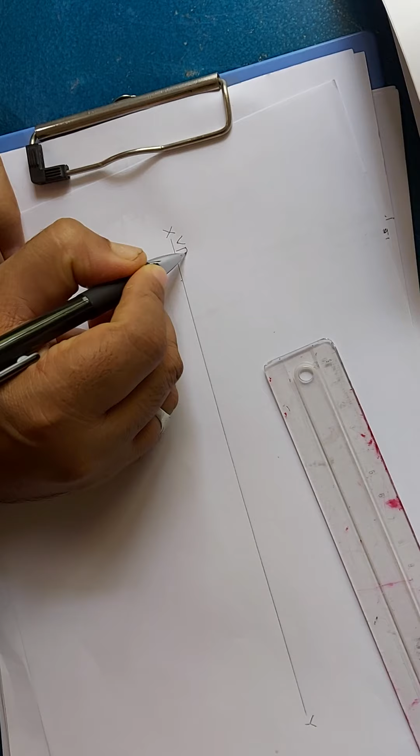Now we have to do the drawing. First we will draw the XY line. Mark VP and HP. Since one of its corners is on HP, whether the corner rests on HP or a side rests on HP, you will always have a side perpendicular to VP.

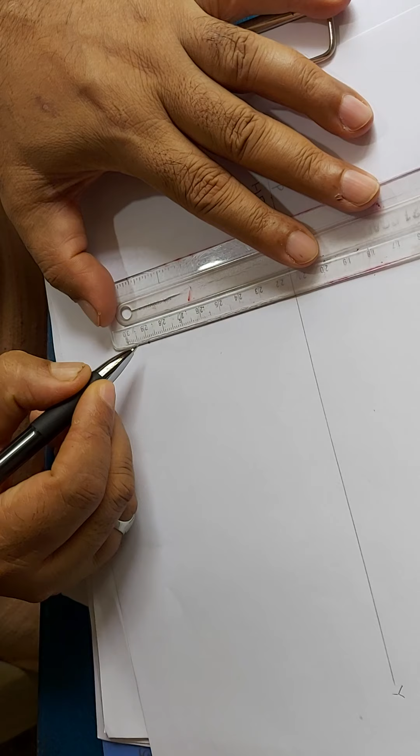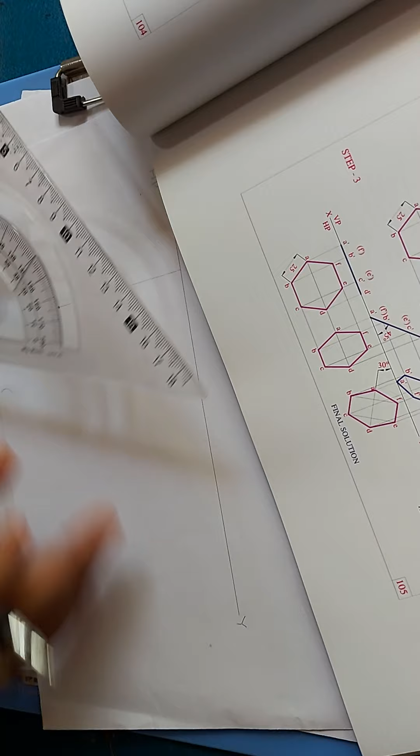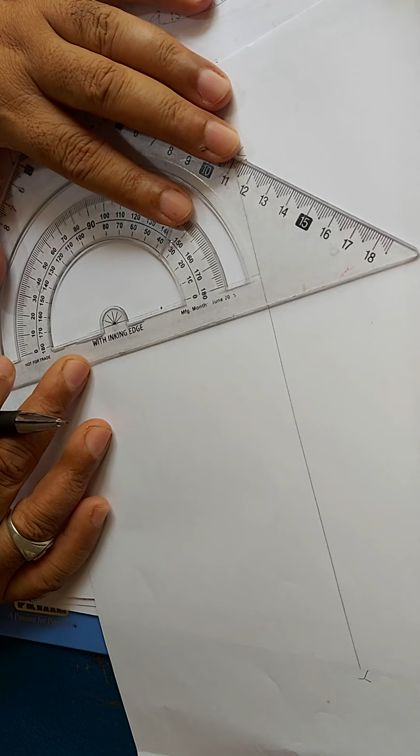From here you measure 25 mm. So you take 25 mm and mark this point. From this point you mark 72 degrees, the exterior angle, and similarly from here you mark 72 degrees from the external side. Mark this point and then draw an inclined line, and similarly from this,

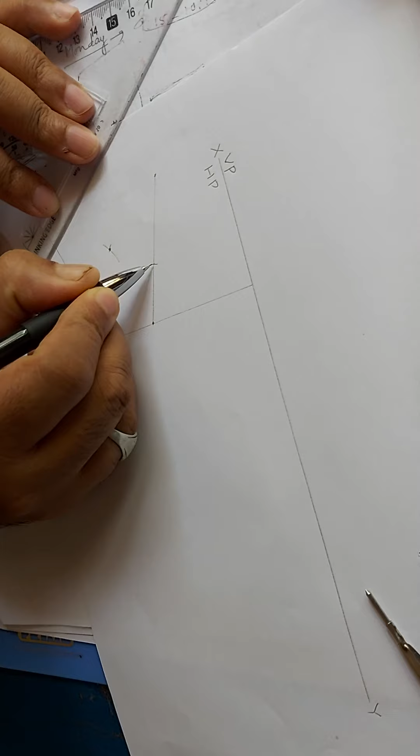then using compass measure 25 mm and from here you cut an arc. Similarly on this side also. Then from this point you draw an arc, and similarly from here you cut the previously drawn arc. So now we have the points. This is A, B, C, D, E. Then dot these sides.

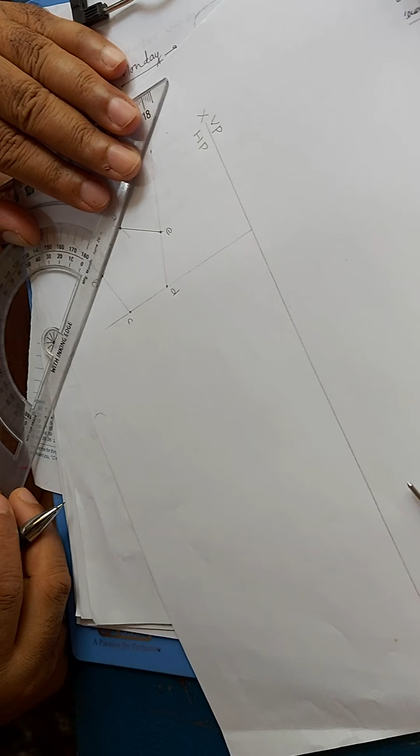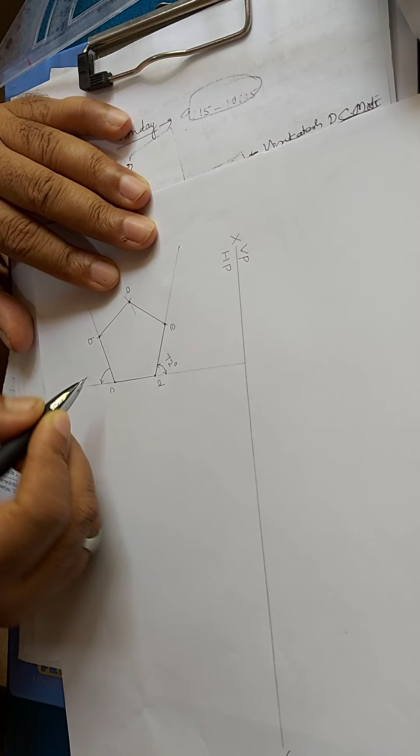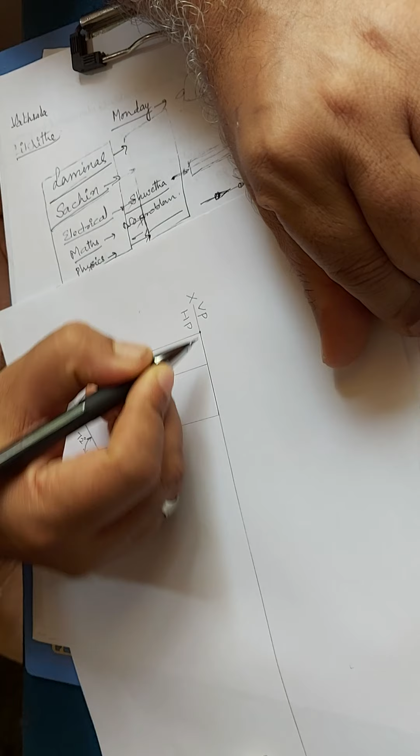So this is the exterior angle, which is 72 degrees from here to here. Similarly from this side also it is 72 degrees. And now from here you project to the front view. This surface is parallel to HP and perpendicular to VP, so you are getting a line in the front view. This point will become A dash, this point B dash and E dash in bracket. Similarly this point will be C dash and D dash.

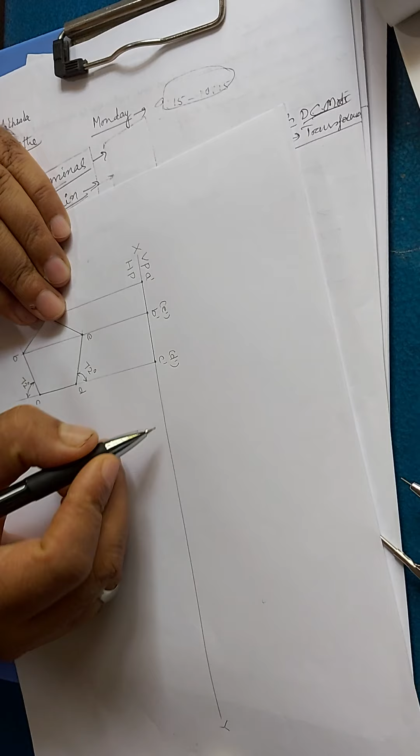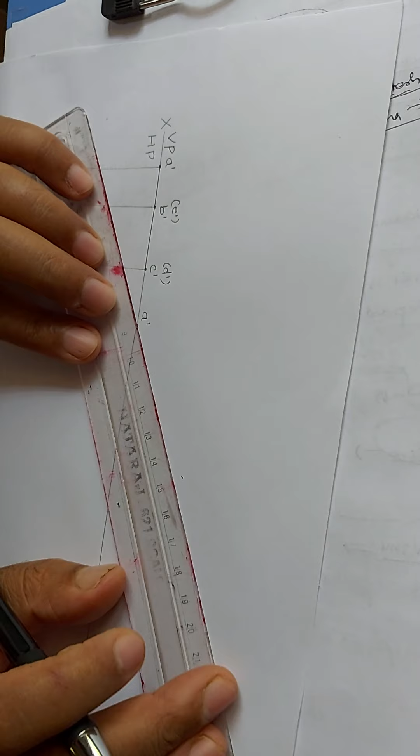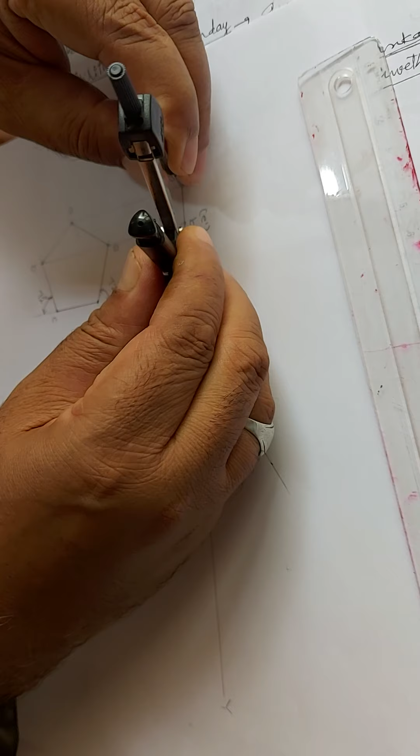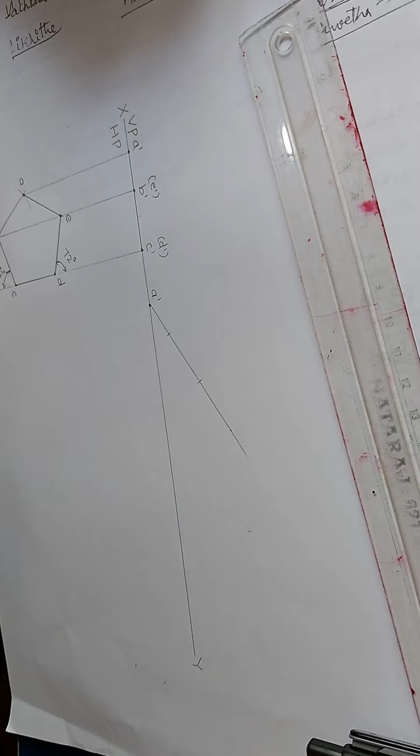Since it is placed on one of its corners, A dash will be on the XY line. From A dash measure an angle of 30 degrees with HP and draw an inclined line. Measure the length from A dash to C dash D dash using compass and cut an arc on this. Similarly measure the length from A dash to B dash and cut an arc. So this point will be C dash D dash, and this point will be B dash E dash.

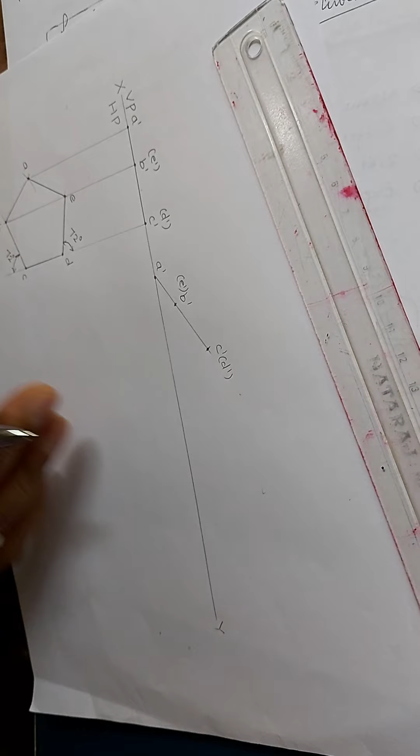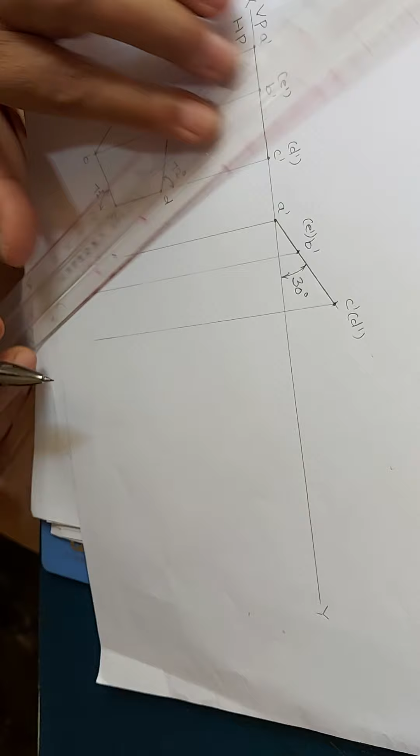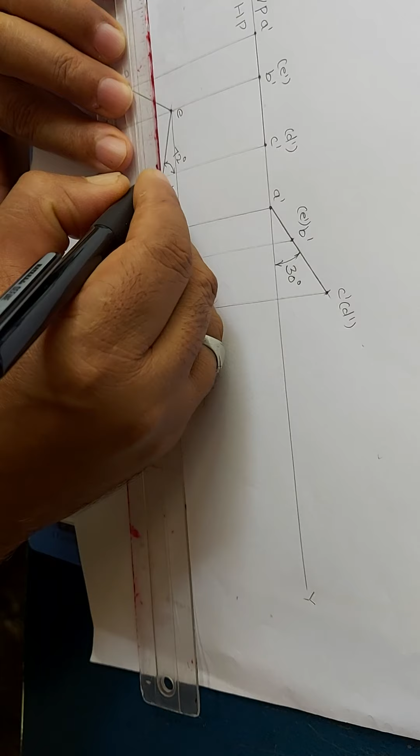Then draw a dark line. Measure the angle as 30 degrees to HP, so the surface is inclined at 30 degrees to HP. Then draw vertical projectors down from each point, and then from here draw horizontal projectors. This is A, this is E, this is B, this is C, and that is D.

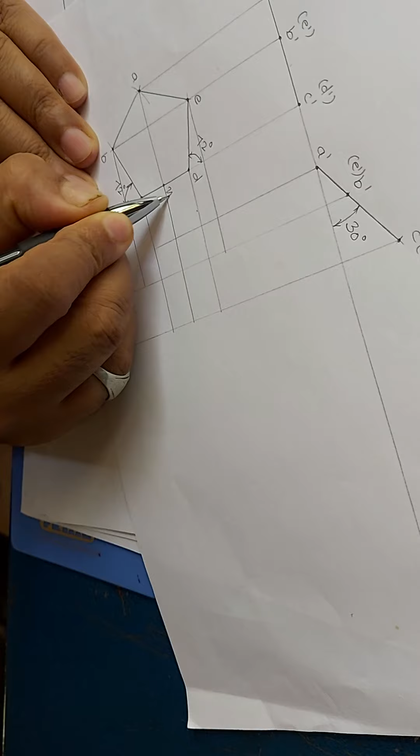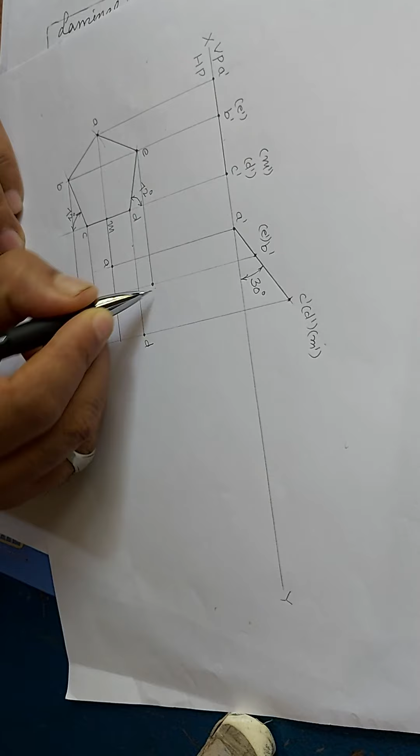Now the perpendicular bisector is the line joining the corner to the midpoint of the opposite edge. So this point will be M. This will be M dash, and this will also be M dash. So the points here are A, B, C, D, E, and M. Since the perpendicular bisector is inclined to HP, we are getting the apparent length. And now darken ABCDE.

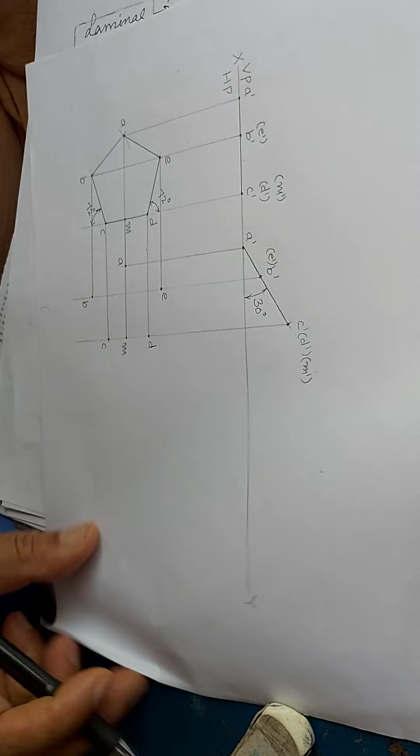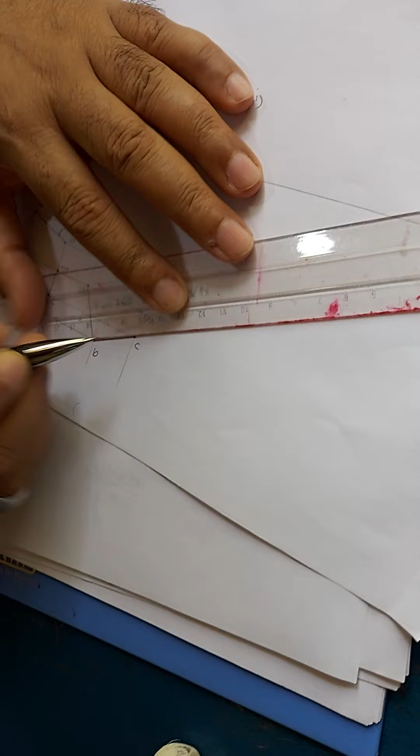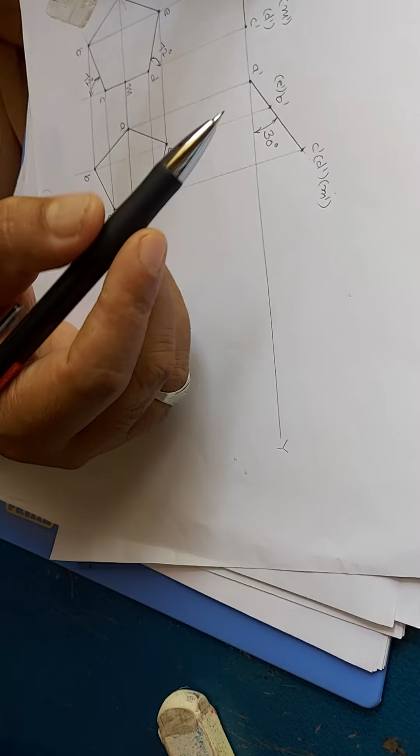C, D, E. The perpendicular bisector passing through the corner on which the lamina rests. So which is the perpendicular bisector passing through the corner on which the lamina rests? A dash M dash is the perpendicular bisector passing through the corner. Corner is A dash, so that is this point.

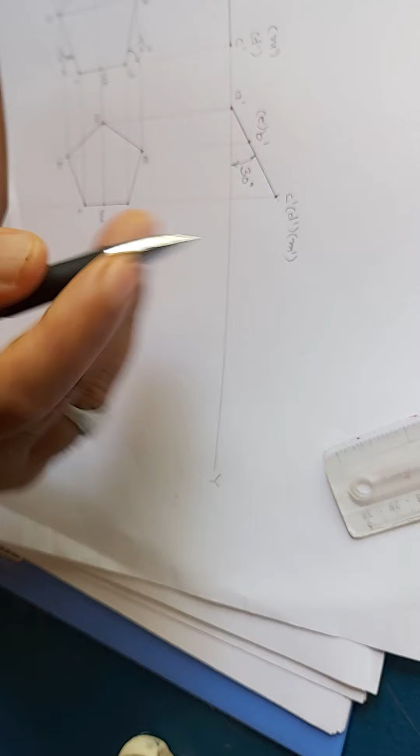Since the perpendicular bisector is inclined to HP, you are getting the apparent length. Since he says it appears to be inclined, the inclination given is also apparent inclination. So the length is also apparent. So we are going to transfer the point directly, or the length directly. So consider any point on the XY line and draw a line inclined at 30 degrees to VP. So I consider somewhere here.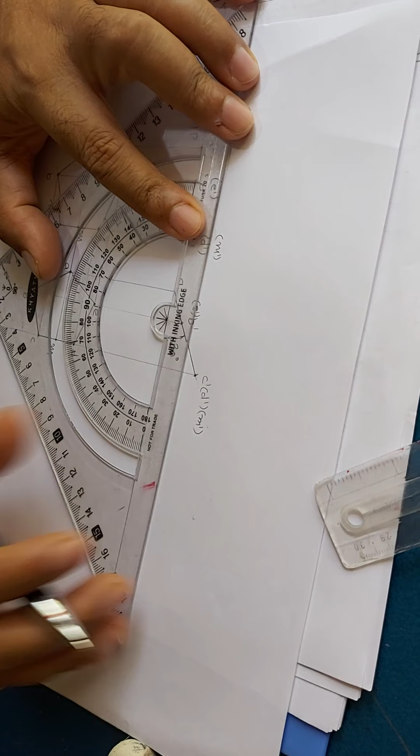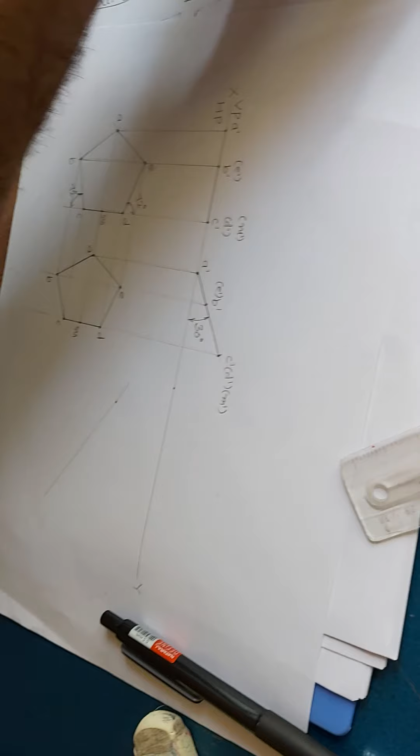From this point I will draw, to utilize the best utility of the sheet. So I will draw from here, measure the length, and only draw this 30 degree somewhere here. Then you measure the length from A to M. So I have to reproduce this sketch. You measure this from A to M, consider any point, and from here you join this. So this point will be A, and this point will be M.

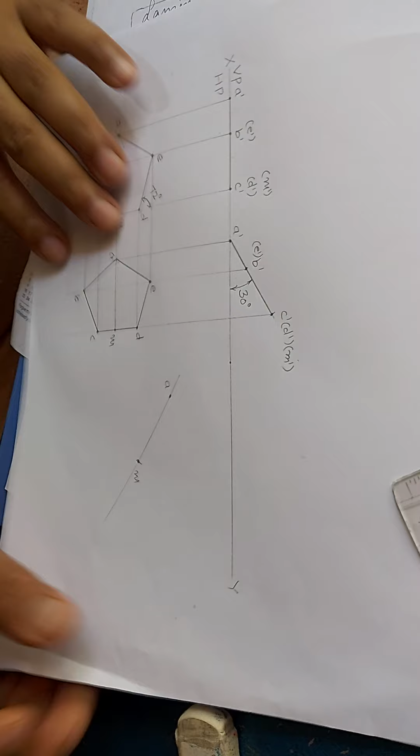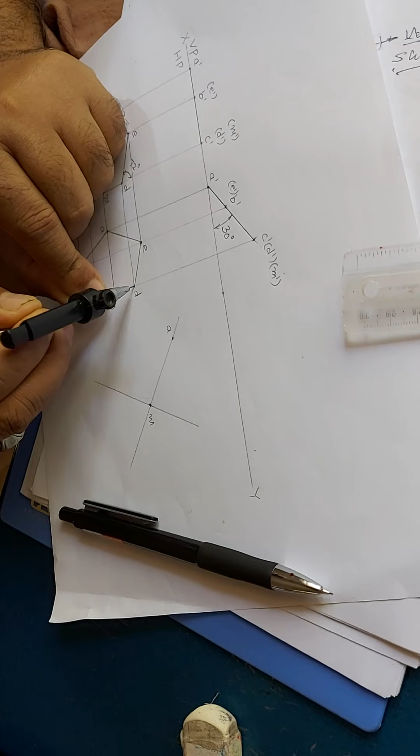Then through M you have a line which is perpendicular to this. So I will mark through that a perpendicular line. By using the protractor, you mark that perpendicular to the inclined line, and then transfer this distance from here to here. So from here you mark this point on this side, and similarly on this side. So this point will become C, and this point will become D.

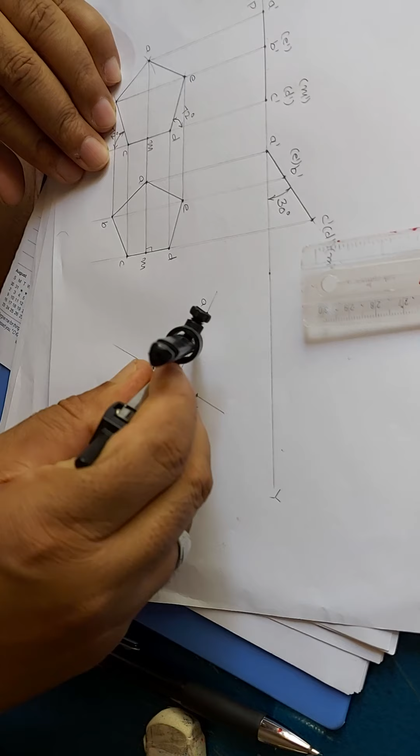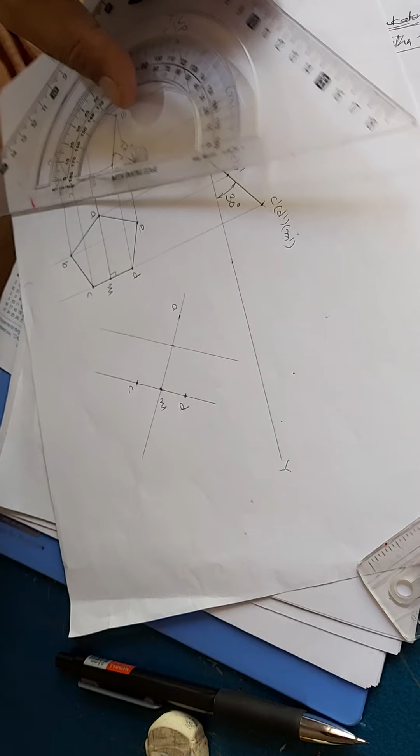Similarly, you measure the length from M to this distance, and similarly from M you mark that point. Then from this you draw a perpendicular again, and then from this you mark on this side and also on this side. Then you mark this point which is B, and this is E. So this completes the pentagon.

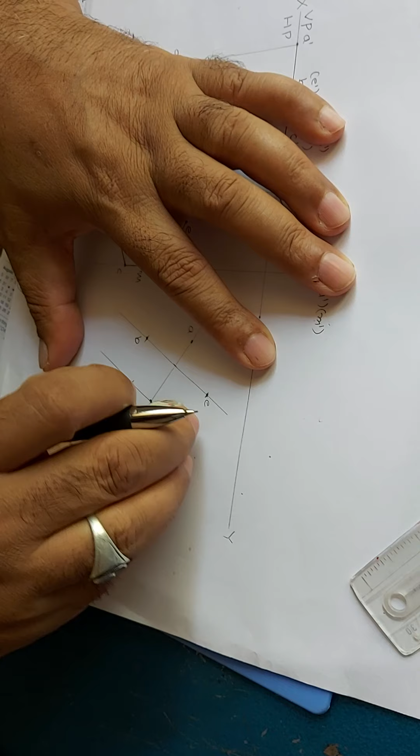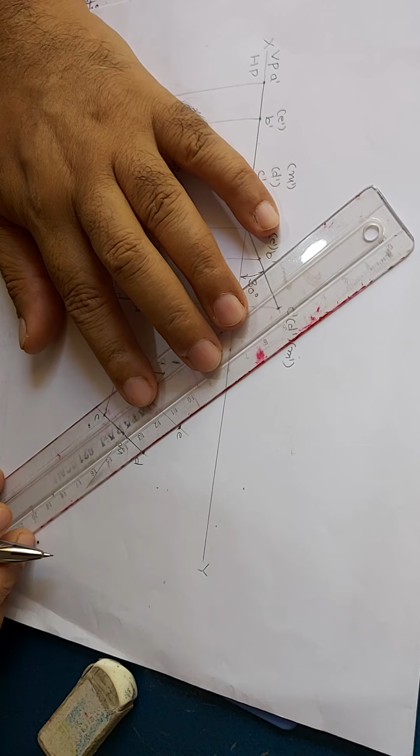So join these by means of dark lines here. Draw from A to B, then B to C, then C to D, then D to E, then E to A.

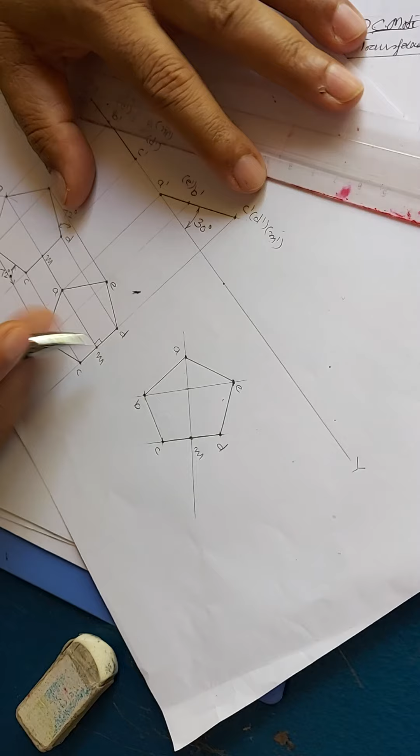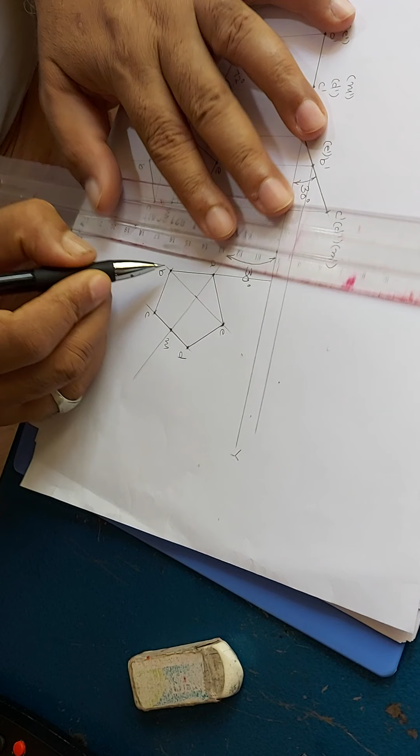The angle of inclination of the perpendicular bisector with respect to VP is given to be 30 degrees. So I will mark this angle as 30 degrees, and then from here draw the front view. So from here mark A, and similarly from B dash E dash you draw a horizontal projector. Similarly from B you mark that point, and similarly from E you draw a vertical projector.

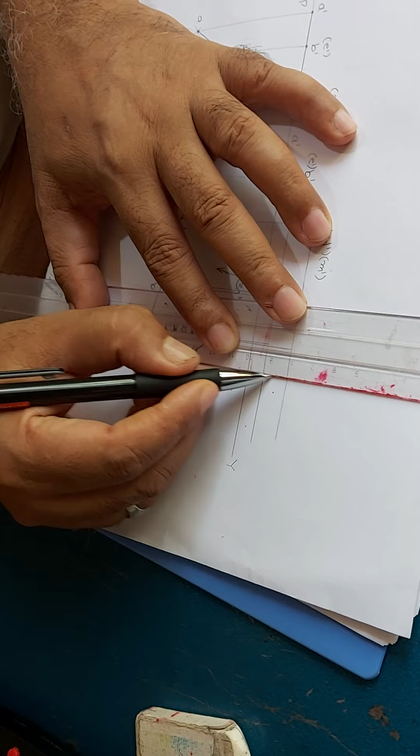Similarly from C dash and D dash you draw a horizontal projector, and from C you draw a vertical projector, and also from D you draw a vertical projector. So you got these points. So from here you mark this point as A dash, and that point as B dash, this point is C dash, this point is D dash, and this point is E dash.

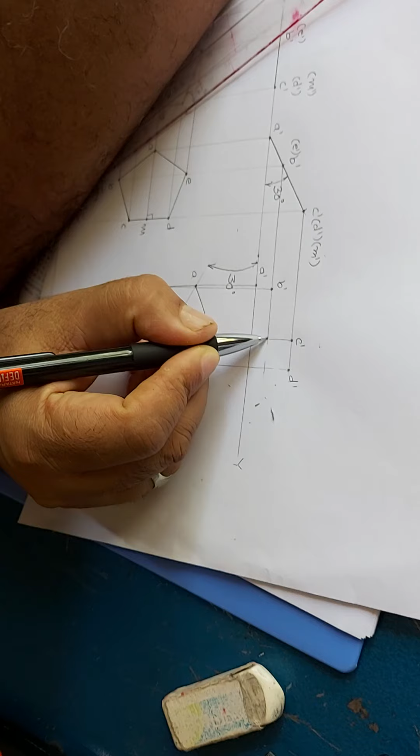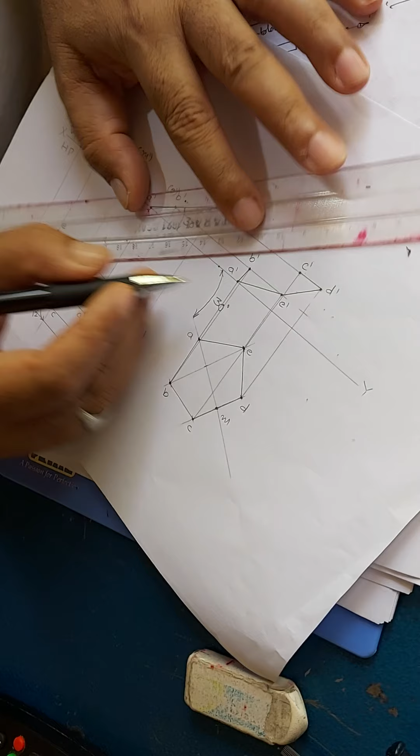Then join C dash to D dash with a dark line, D dash to E dash with a dark line, and E dash to A dash with a dark line, and A dash to B dash to C dash with a dark line. So this completes the sketch.

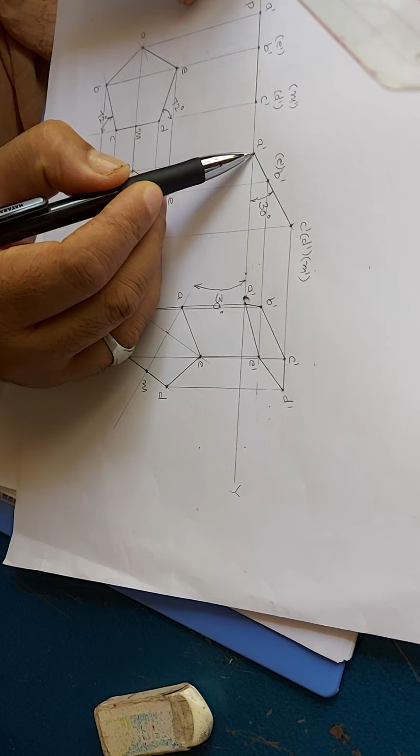So how do I know that my problem is right? Since it's resting on one of the corners, the perpendicular bisector appears to be inclined to VP at 30 degrees, and the surface is inclined at 30 degrees to HP, and it is resting on one of the corners. So all the conditions of the problem have been satisfied, hence the problem is right. Okay, this is 25 mm.